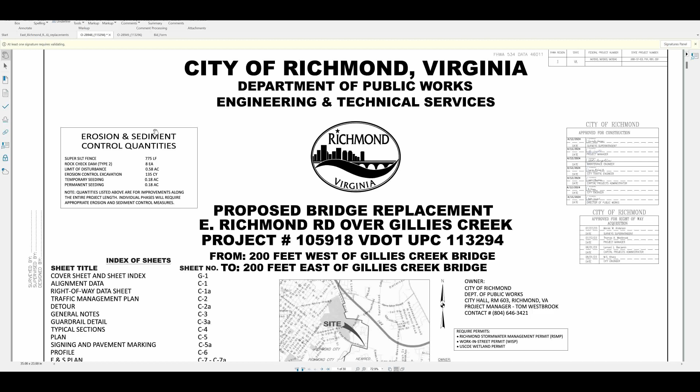Hey, all right guys, we are looking at the City of Richmond proposed bridge replacement for two bridges over on East Richmond Road in the east end of the city. One goes over Gillies Creek and one goes over Stony Run, a couple small bridges over there. Just going to run through these with you guys real quick.

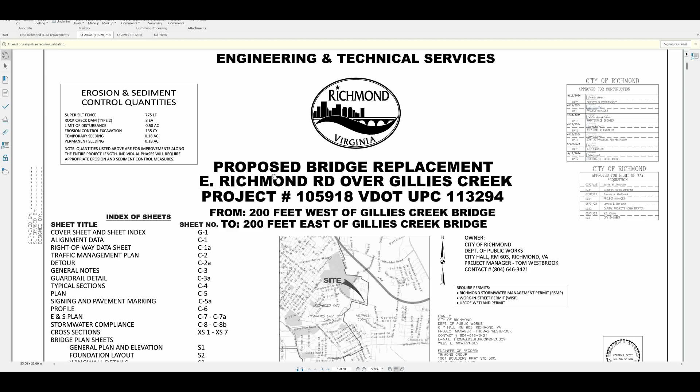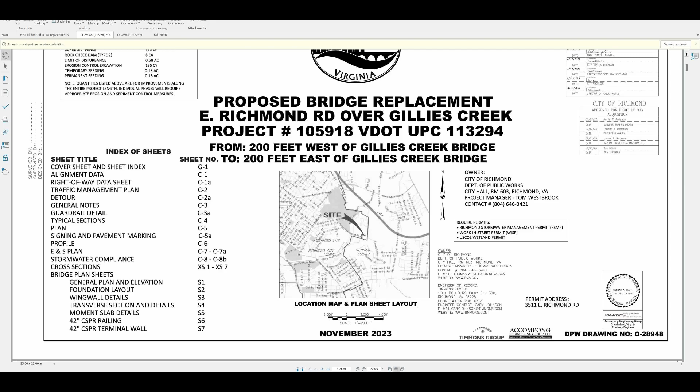So we've got, and these are two projects that appear to be being bid under one bid. It's a little strange, but happens from time to time. So here's the site location: East Richmond Road, in the east end of the city, right on the border of Henrico County.

So everybody that lives over here is going to have to drive all the way around to get over here and vice versa. So this is the proposed detour plan. This is I-64 up here. So this is Masonic Lane, I believe, or Brittles Lane. And then East Richmond Road here, Government Road here, Stony Run. You got Williamsburg Avenue over here. Williamsburg Road continues down into Williamsburg Avenue.

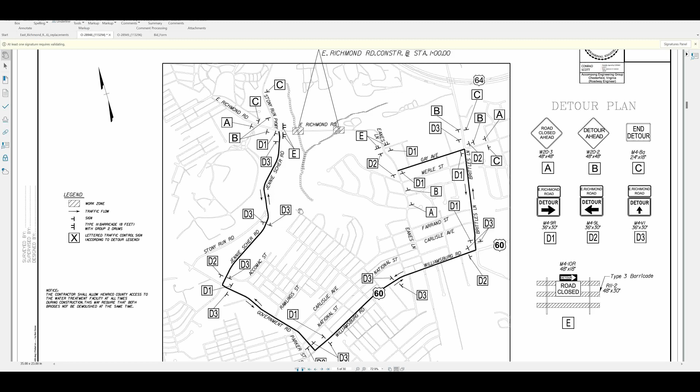So everybody that lives in like Montrose, to get over here, is going to have to go west. This is going to be difficult, especially with the closure that's already ongoing on Williamsburg Avenue for another project over there. We can take a quick look at Google Maps and see.

So you've got Gillies Creek here. So you got this bridge here that's being replaced, and Stony Run is over here. So here's that bridge that's being replaced.

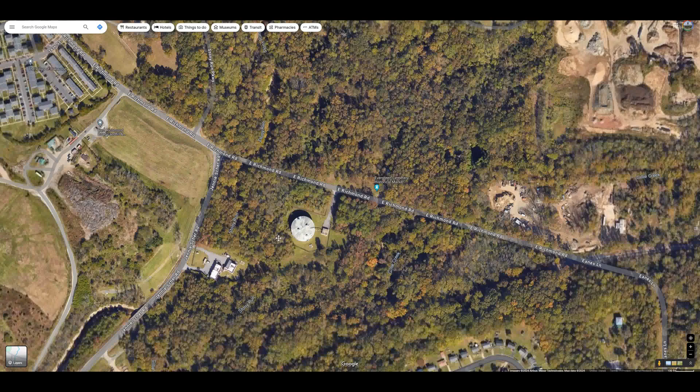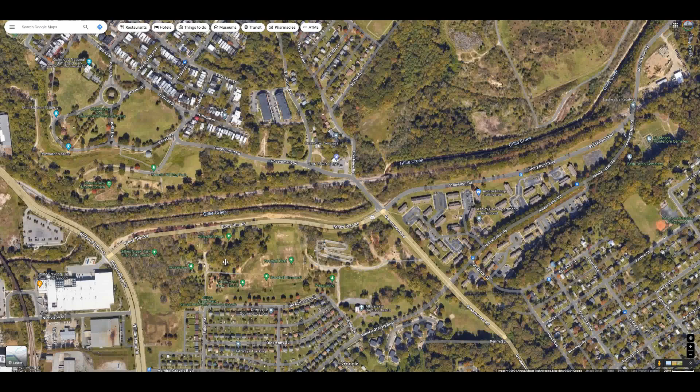And this is a little zoom out, you got the Richmond City. There's a landfill over here, and Montrose Heights, Fulton Hill neighborhood, Stony Run, Government Road, which is bad over here right now. I know that this section of Government Road is closed right now from the top of the hill to Glenwood, I think, right here.

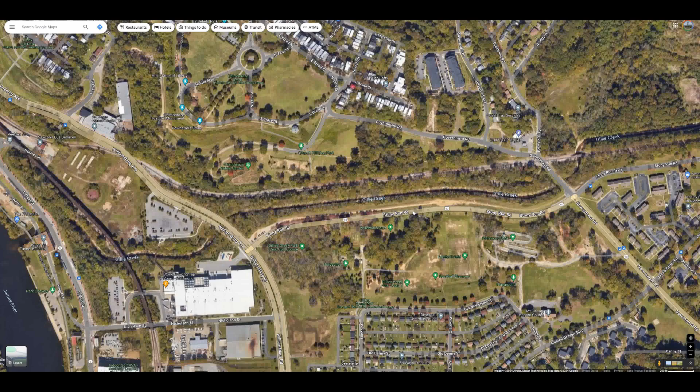And then there's also the westbound lane of Williamsburg Avenue that's closed from Stony Run up to 31st Street. So a lot of road closures in the East End right now, unfortunately, for all you people that live over there, as well as for everybody else that's commuting in from the east end of like Henrico.

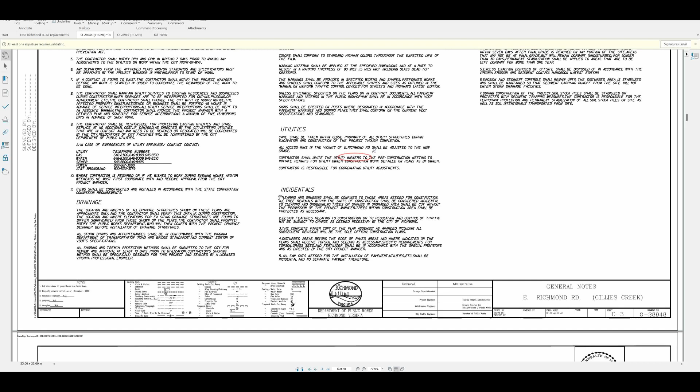So back to the contract, general notes. I did notice this one general note that contractors shall invite the utility owners to the pre-construction meeting to initiate permits for the utility owner. Not sure what a utility wiener is, but they might want to fix that typo.

So you got guardrail details, other drawings and details here. It's really not going to change too much, other than just be probably a little bit wider and have some guardrails, and basically just be a nicer looking and probably riding bridge for both of these.

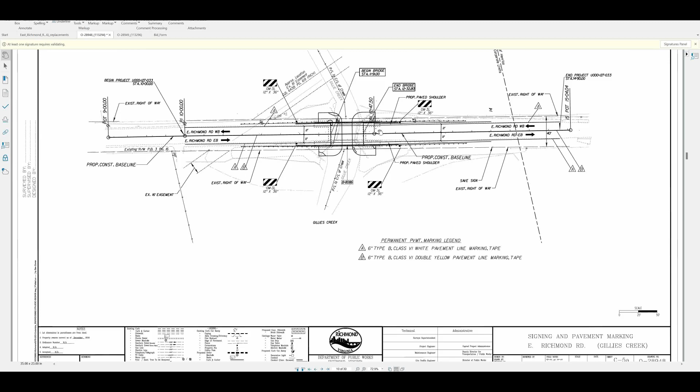It is a precast bridge, so they will be hauling in sections. They're like arch sections that get filled with dirt, and there's a structural pile foundation below. We'll get to those drawings here in a minute. It's a bunch of E&S stuff.

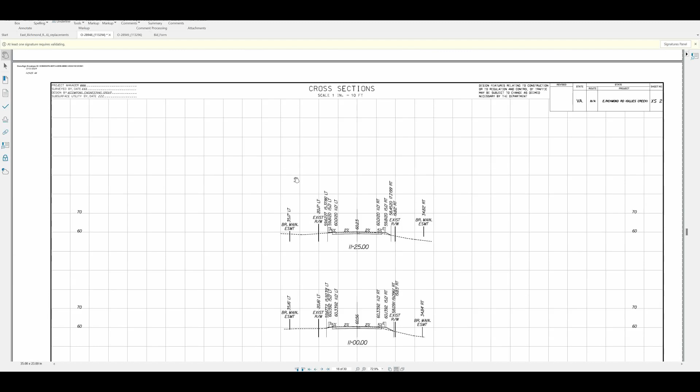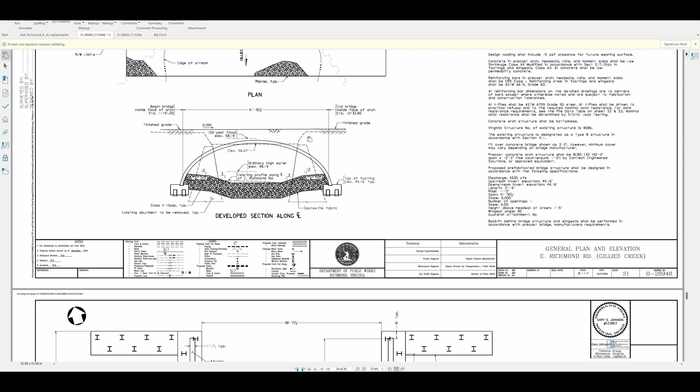Here's a little more detail on what we're going to see. If you're standing in the creek, it's going to be an arch structure, and these segments here are going to be precast segments that'll be brought in sections and set, then filled with dirt or gravel and paved over top.

Here's your foundation. It does say they can submit an alternate footing design if they'd like to. You've got your H piles going down into the ground, rebar and concrete for your footing, and here's the precast bridge structure. So that will span across like this.

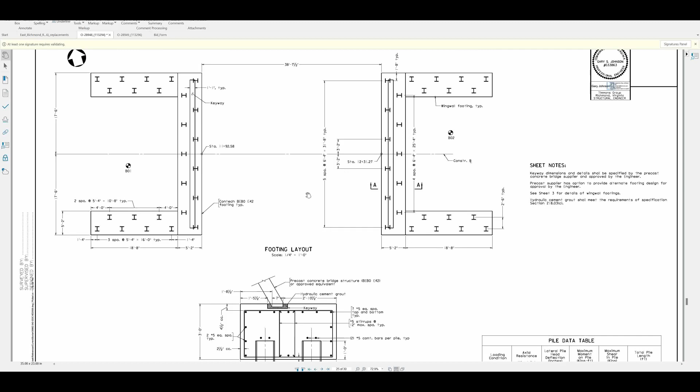This is as if you were looking down on it from an overhead view. Here's a more completed view. It looks like cast-in-place concrete sidewalls along the sides here. So these are precast, and the side structures here are concrete. The rest will be filled with dirt or aggregate and paved over top.

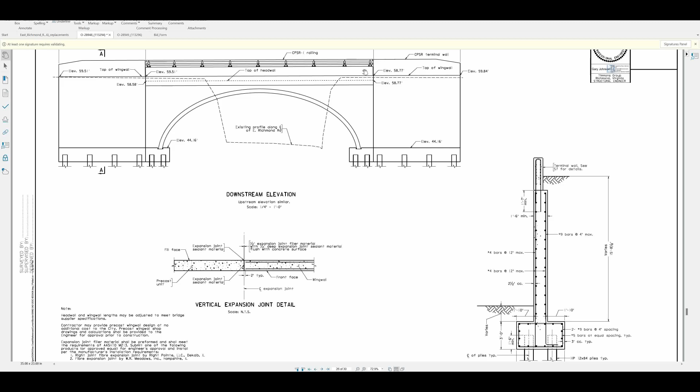And there's a terminal wall here, some guardrails, that sort of thing. More guardrail details, rebar details, and structural stuff. So that is the Gillies bridge.

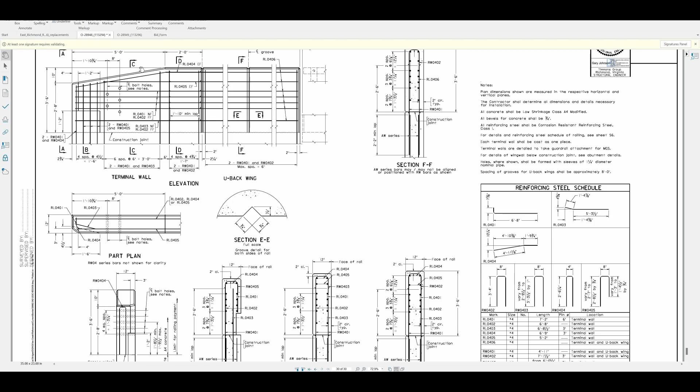Here is the Stony Run bridge. They're pretty much identical. You'll get some guardrail and whatnot over here, same thing, a paved shoulder. Hopefully it'll be a little bit wider, because I know that road is very narrow as it is right now.

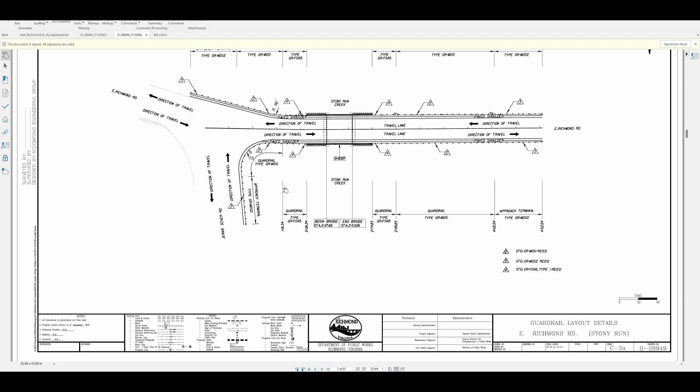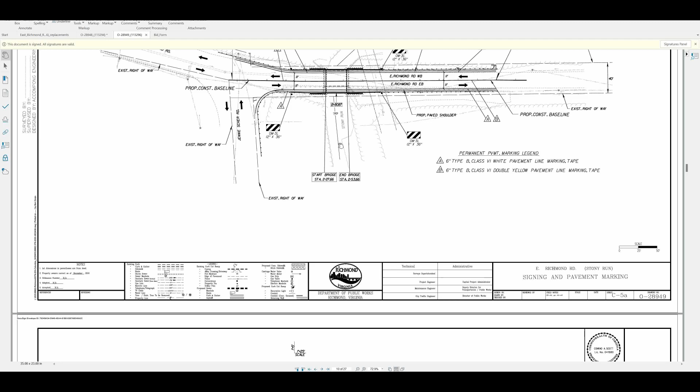But I believe you're still looking at like 10-foot travel lanes, and I didn't see a sidewalk on there either, which is kind of interesting. But that's not an area that gets a ton of pedestrians, I don't think. And there's no sidewalk on either side of the road as it is right now anyway, so if they didn't do it, that's probably why.

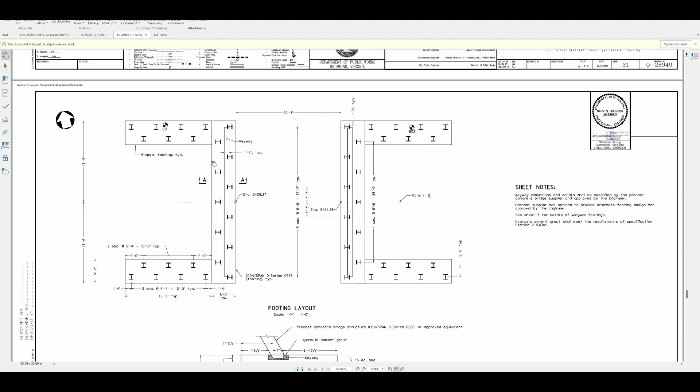These drawings are almost identical to the Gillies drawing. So we'll get down here to the... there you go, there's your precast arch structure, with the same type of pile foundation and a concrete footing on top.

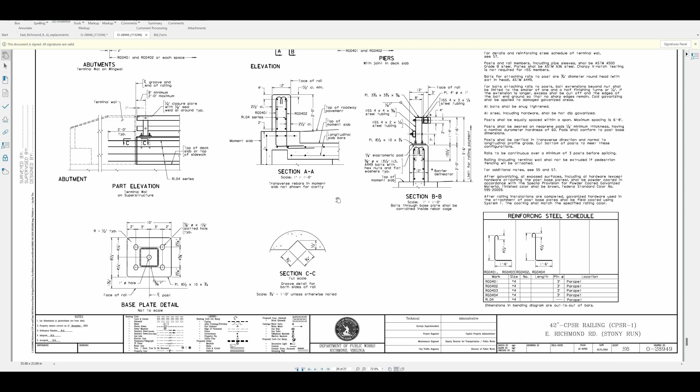Guardrail, terminal walls, all that sort of thing. So that's what you're going to get over there. Like I said, 540 days for this one. I did notice they say in the contract that they can work 24/7, which I thought was a little odd, but I guess there aren't a lot of people living in that immediate area, so it wouldn't impact too many residents.

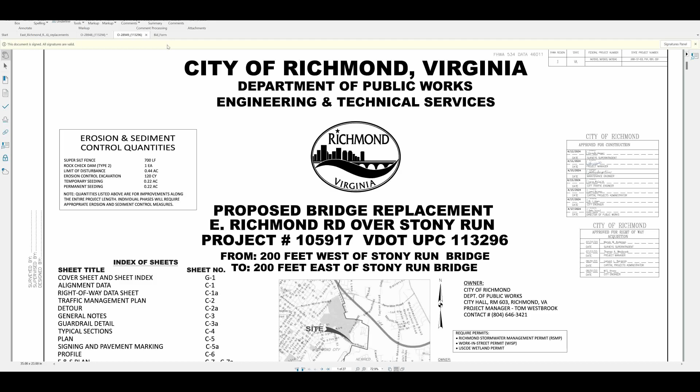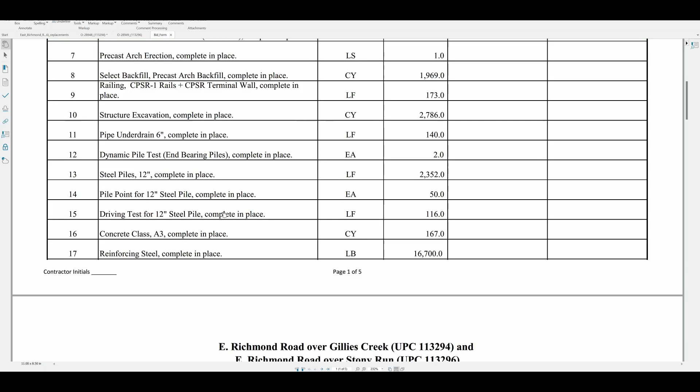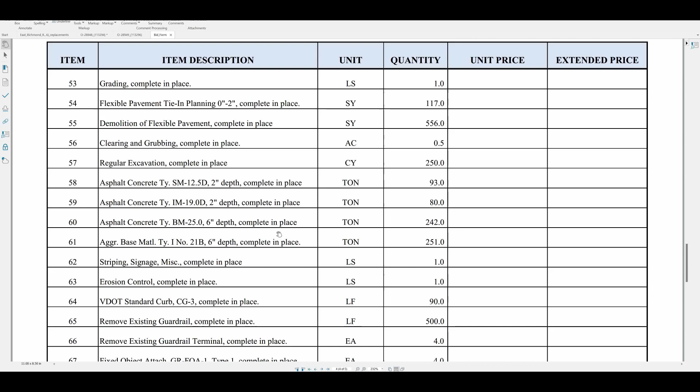The bid form is the same for this one. They do a lot of these unit price bid forms, which I don't like, but that's just me, as well as the fact that it doesn't get you a hard bid price. You've got to basically keep track of all these amounts, and if you go over or under, the contract price changes.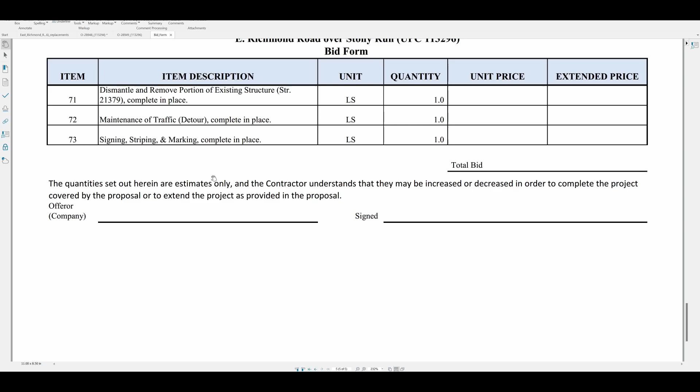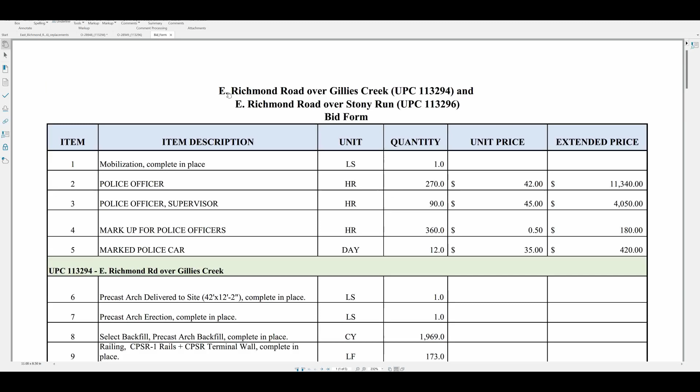It states in here that the contractor understands the price may be increased or decreased in order to complete the project covered by the proposal. So it says the quantities are estimates, meaning the bid price is probably not going to be the final bid price. But that is pretty much it.

Gillies Creek and Stony Run on East Richmond Road over in the east end of Richmond, Virginia.